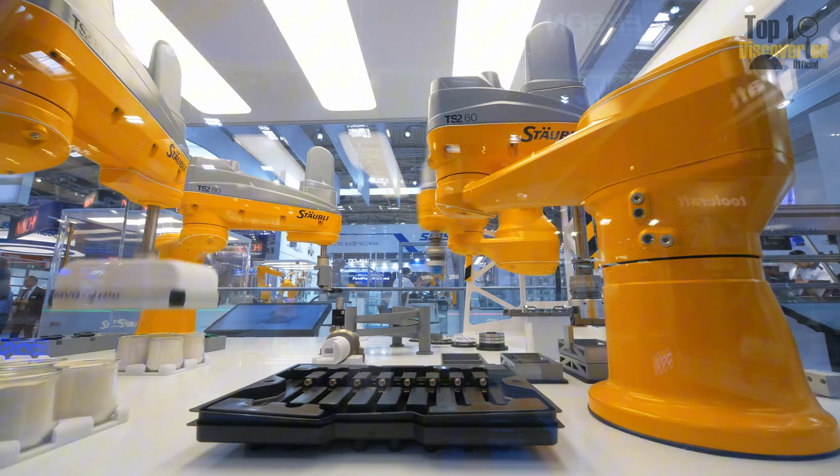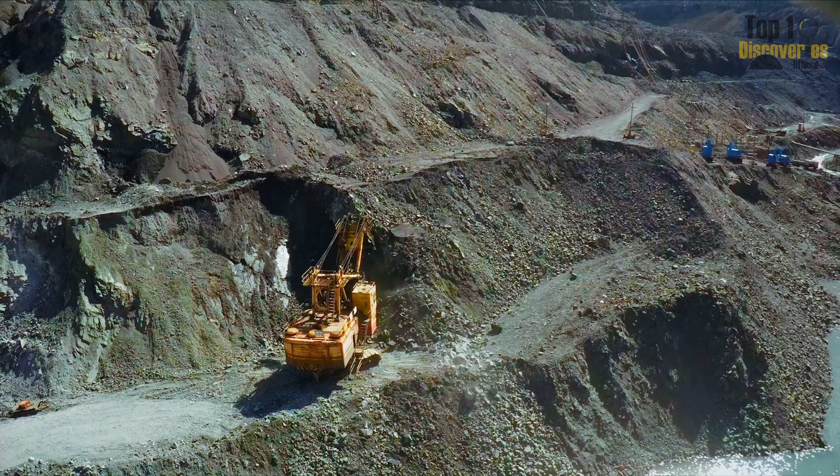Energy forms the foundation of modern existence, driving everything from illuminating bustling cities to fueling industrial manufacturing and supporting advanced technological infrastructure. For more than 100 years, the world has relied heavily on coal, oil, and natural gas as primary energy sources. These resources provide stability, but carry severe consequences: carbon dioxide emissions, climate change, air pollution, and significant risks to public health and well-being.

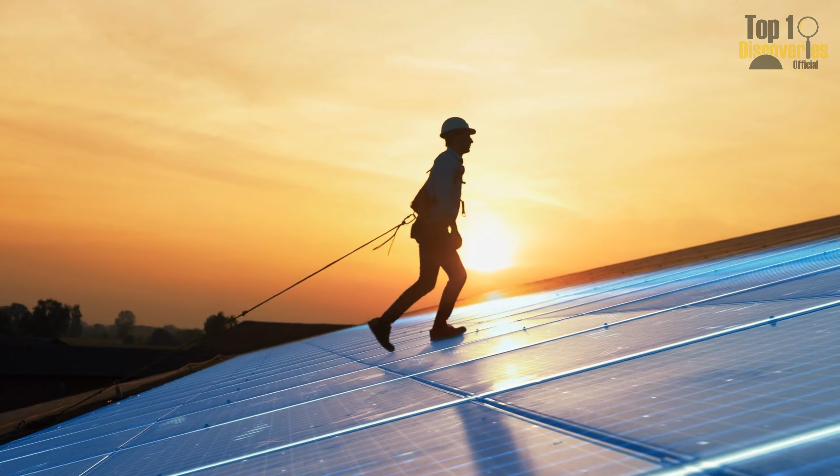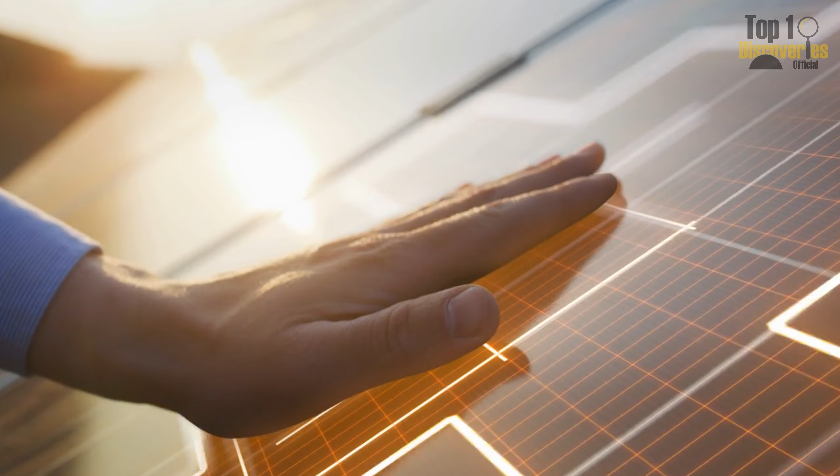Renewable energy options, such as wind, solar, and hydroelectric power, are increasingly viewed as viable replacements. Yet they come with inherent drawbacks. Their output hinges on unpredictable weather conditions, making consistent energy supply challenging. A wind farm, for instance, can produce hundreds of megawatts of electricity when conditions are optimal, but its output plummets when winds are faint or inconsistent. Similarly, solar panels operate effectively during daylight hours, but lose nearly all functionality under cloudy skies or at night.

At the same time, global energy demand is surging at an unprecedented rate. Data centers powering artificial intelligence, high-tech manufacturing facilities, and electrified transportation networks all require a steady, large-scale, and reliable electricity supply. The critical question is not merely about having enough electricity, but ensuring that electricity is clean, safe, and consistently available to meet these growing needs.

Confronted with the dual challenge of sustaining economic growth while drastically reducing harmful emissions, the world is urgently seeking innovative solutions. This is where next-generation nuclear technology, specifically small modular reactors, steps into the spotlight. These advanced systems are increasingly seen as a vital component, offering a transformative approach to achieving a sustainable, reliable, and environmentally friendly energy future.

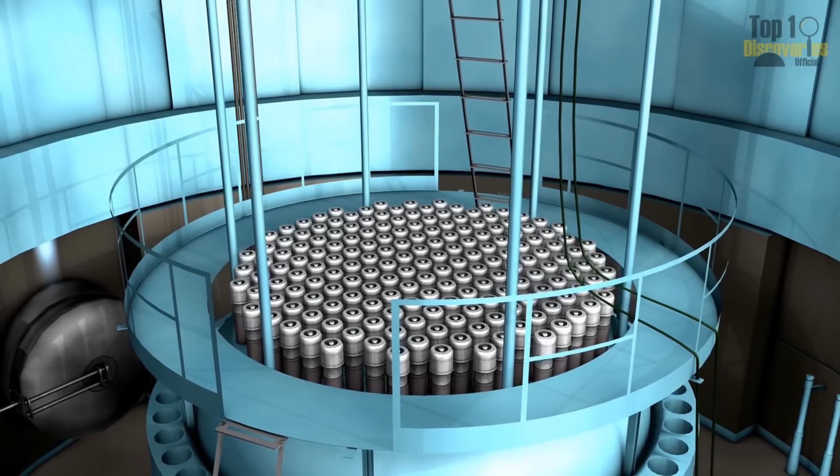While traditional nuclear power plants are often associated with colossal structures, costs soaring to tens of billions of dollars, and construction timelines stretching beyond 10 years, small modular reactors, known as SMRs, introduce a completely different paradigm. As their name suggests, the key difference lies in their compact size and innovative design. An SMR facility can fit within an area comparable to a single football field, a stark contrast to the sprawling nuclear complexes that once occupied hundreds of acres of land.

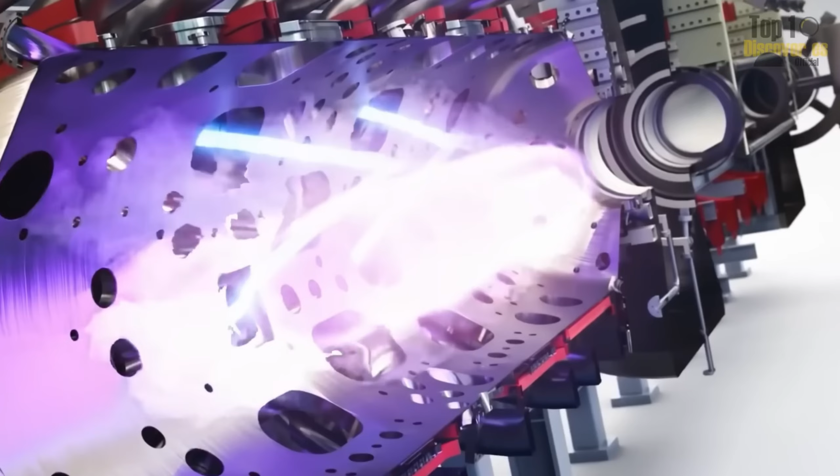This reduced footprint does not mean diminished capacity. A standard SMR can generate between 50 and 300 megawatts of electricity, enough to power a small city, an industrial zone, or a large-scale data center critical for modern technology.

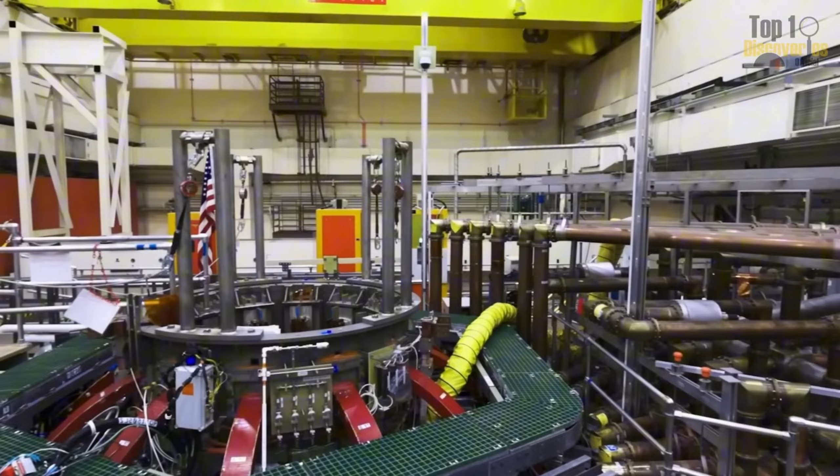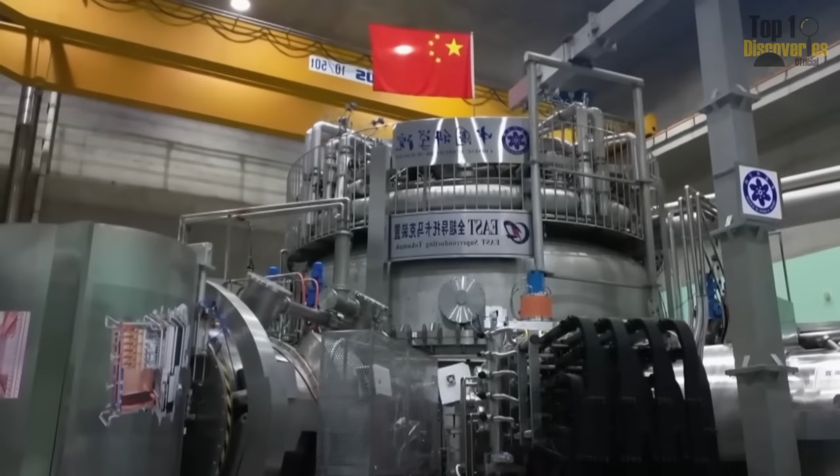The second groundbreaking feature is modularity. Instead of building the entire facility on site, the core components of SMRs are prefabricated in controlled factory environments with rigorous quality assurance processes. These pre-built modules are then transported to the installation site and assembled like interlocking building blocks. This approach dramatically shortens construction timelines, reduces the risk of project delays, and mitigates cost overruns, persistent issues that have haunted the nuclear industry for decades.

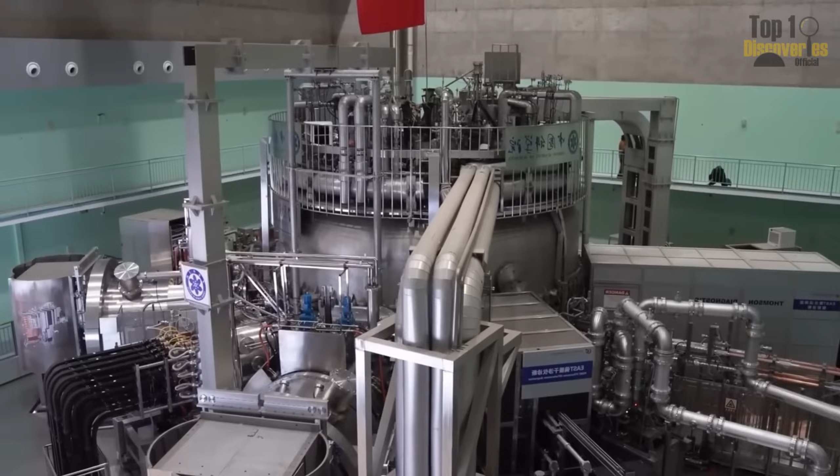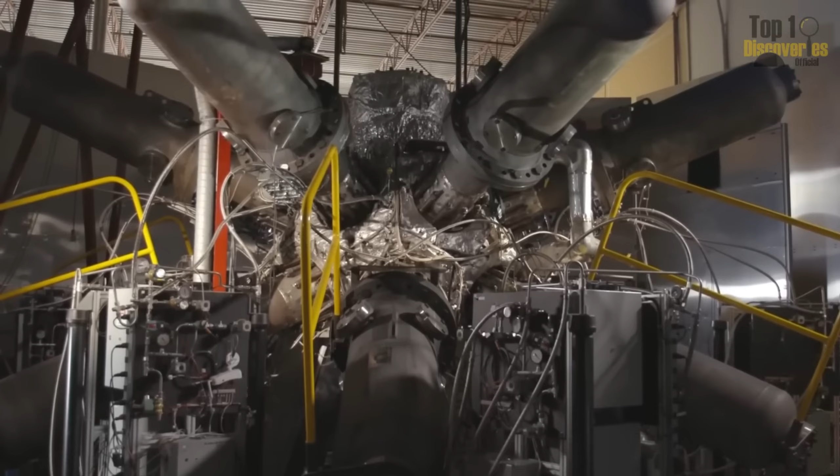Energy providers can start with a single reactor and scale up by adding more modules as energy needs grow, similar to how data centers expand by integrating additional server units. SMRs are also designed with superior safety features. Many models incorporate passive safety systems that operate using natural physical principles, such as gravity, convection, or atmospheric pressure, rather than relying entirely on electric pumps or complex mechanical equipment. This design reduces the likelihood of accidents and enhances the reactor's ability to remain stable during emergency situations.

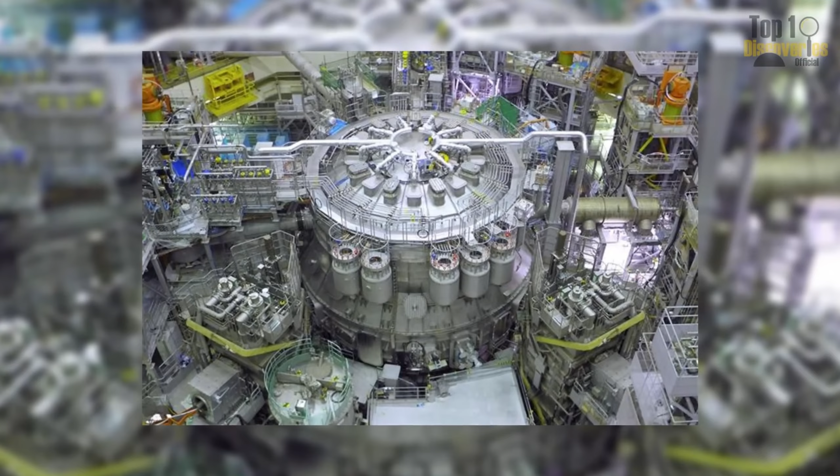With lower heat generation and moderate fuel requirements, SMRs also significantly minimize the risk of reactor core meltdowns, a concern that often fuels public apprehension about nuclear energy.

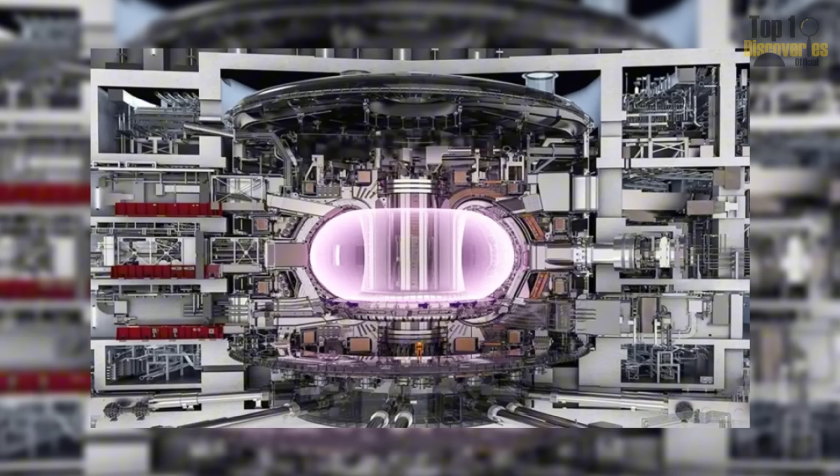Beyond electricity production, SMRs offer remarkable versatility across a range of applications. They can supply steam for chemical manufacturing plants, oil refineries, or material production facilities, provide heat for urban heating networks, and even support seawater desalination to produce fresh water in regions facing water scarcity. This adaptability makes SMRs an appealing solution for countries with diverse energy demands, from sustaining industrial operations to improving living standards for communities.

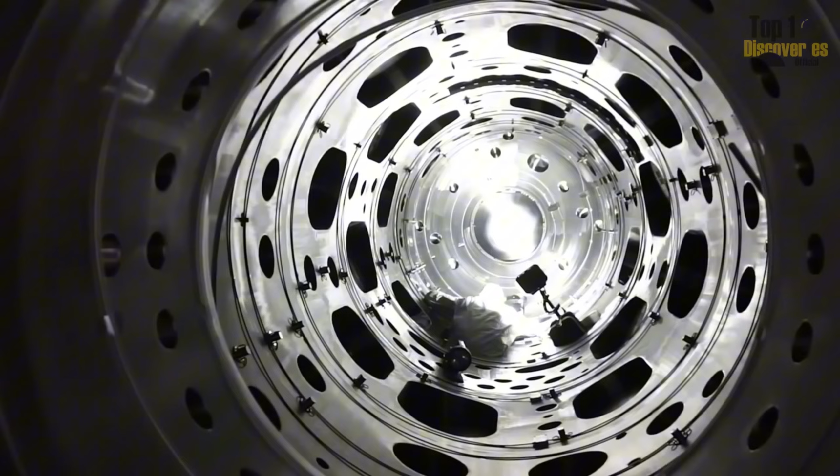Another key advantage is their flexible deployment. Thanks to their compact size and optimized safety protocols, SMRs can be installed closer to energy consumption hubs, rather than in remote, isolated locations. This proximity reduces electricity transmission costs and enables cities, industrial parks, or even remote islands to access reliable, on-site energy sources, enhancing energy security and efficiency.

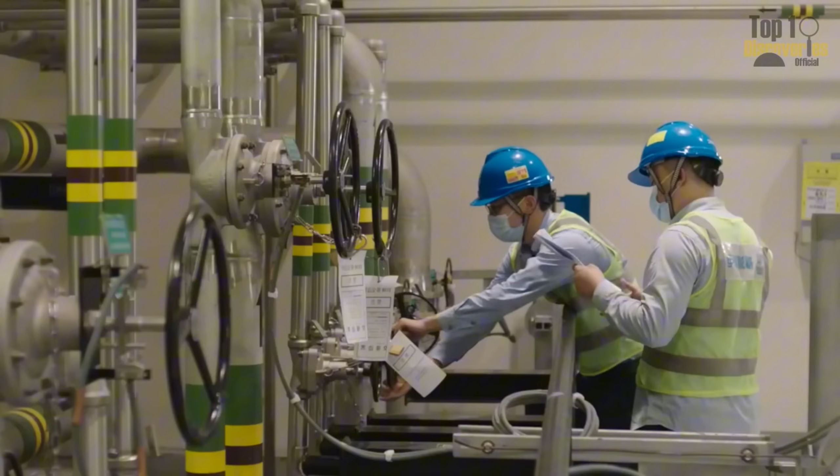The emergence of SMRs is reshaping how we view nuclear power. If traditional nuclear plants are akin to the bulky mainframes of the information technology world, SMRs are the compact, flexible, and scalable servers of the energy sector. This transformation marks the dawn of a new era, where nuclear energy can integrate seamlessly into power systems, working in harmony with renewable energy sources to build a sustainable, low-carbon electricity grid for the future.

China is swiftly emerging as a trailblazer in transforming small modular reactors, known as SMRs, from visionary concepts into tangible, operational realities. For many decades, the majority of nuclear energy projects were concentrated in nations like the United States, France, and Russia. However, China has now taken the lead by rapidly deploying advanced technologies that many other countries have only progressed to the design phase.

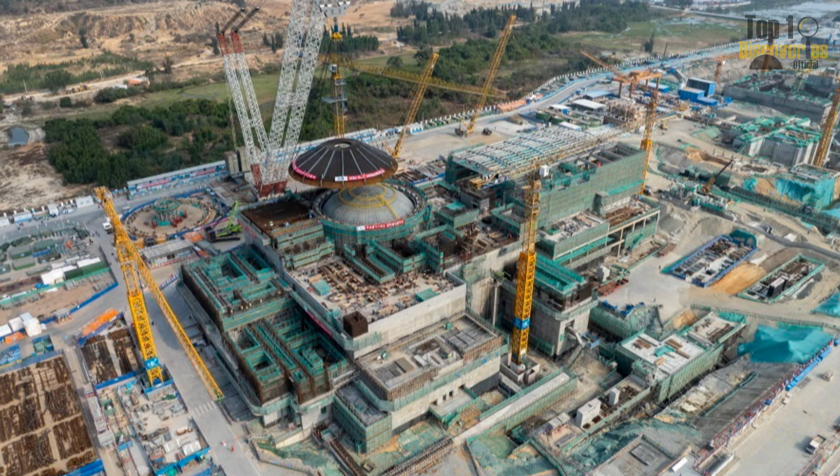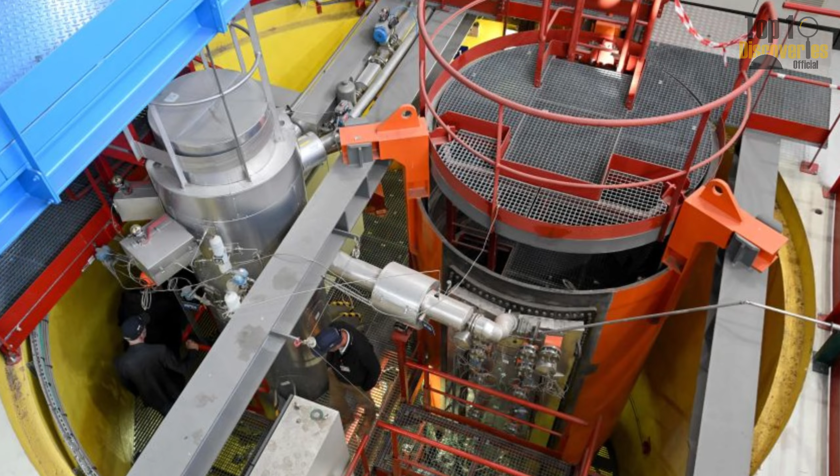Two flagship projects exemplifying this remarkable advancement are the HTR-PM and the Linglong One, showcasing China's bold strides in nuclear innovation. The HTR-PM, situated in Shandong province, holds the distinction of being the world's first commercially operational fourth-generation, high-temperature, gas-cooled reactor. Unlike traditional nuclear reactors that rely on water for cooling, the HTR-PM utilizes helium, an inert gas, to efficiently transfer heat. Each individual module of the system generates a capacity of 105 megawatts of electricity, and when two modules are combined, the total output reaches approximately 210 megawatts.

This substantial capacity is sufficient to provide stable, reliable electricity to more than 1 million residents. The successful commercial operation of the HTR-PM marks a historic milestone. It represents the first time a fourth-generation nuclear technology has been fully implemented in practical use on a global scale.

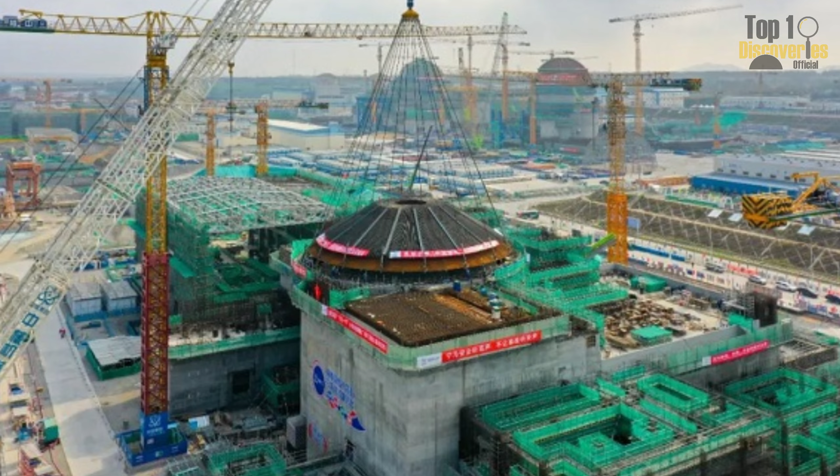Similarly, the Linglong One, also known as ACP-100, located on Hainan Island, stands as the first land-based commercial small modular reactor to receive approval from the International Atomic Energy Agency. With a generating capacity of 125 megawatts, the Linglong One can supply electricity to approximately 500,000 households. However, its significance extends far beyond power generation.

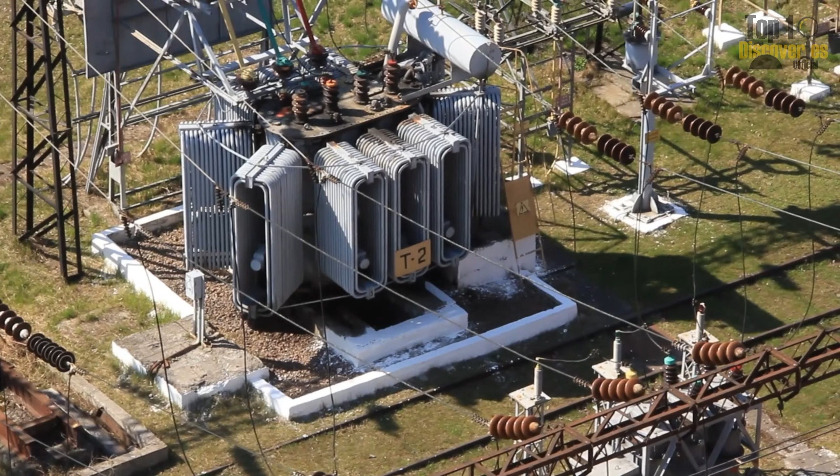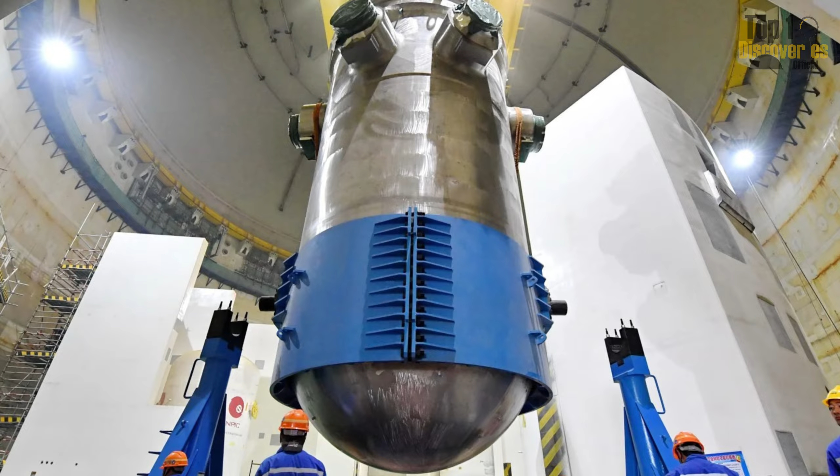The reactor's versatility enables it to provide heat for urban heating systems, produce steam for industrial applications, and, most notably, support seawater desalination, a critical necessity in Hainan, where freshwater resources are scarce, capable of converting seawater into tens of thousands of cubic meters of fresh water each day. The Linglong One demonstrates that SMRs are not merely sources of electricity, but also multifaceted infrastructure solutions addressing diverse needs.

What sets China apart is the extraordinary speed and expansive scale of its deployment efforts. While some small modular reactor projects in the United States or Europe remain mired in the regulatory approval process, China has already brought next-generation reactors into full commercial operation. The Chinese government has set ambitious targets to deploy numerous SMRs across the nation, with a particular focus on industrial cities and coastal regions facing freshwater shortages.

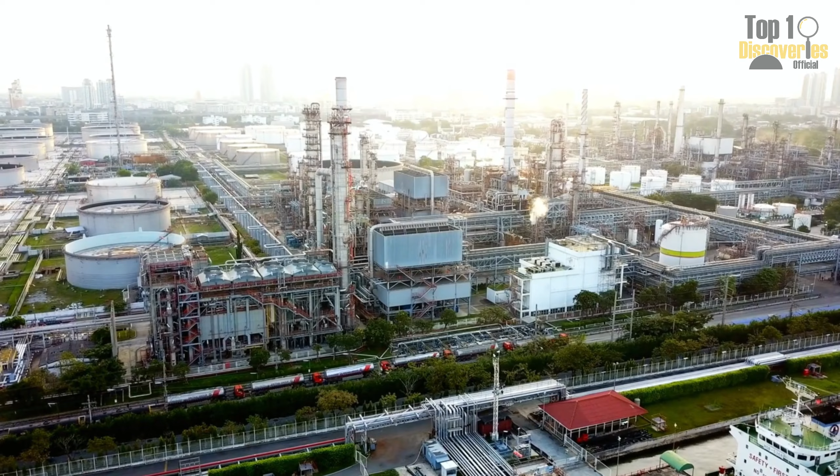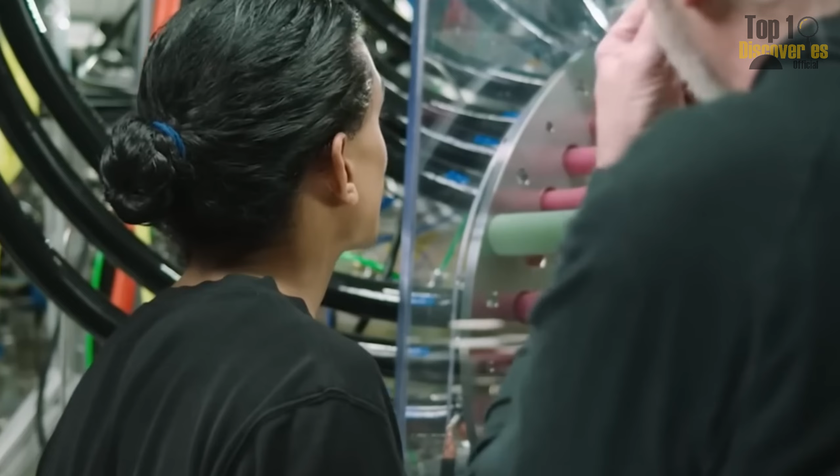This vision extends beyond domestic boundaries. China also aspires to export SMRs, positioning them as a strategic component of its clean energy technology portfolio to serve developing nations worldwide. These advancements highlight China's strategic positioning in the global nuclear energy race. Once a nation reliant on imported nuclear technology, China now independently designs, manufactures, and deploys cutting-edge reactors. Through small modular reactors, the country not only meets its enormous domestic energy demands, but also establishes a powerful new tool for energy diplomacy, solidifying its stature as a leading powerhouse in nuclear technology innovation.

Finland, a nation located in the far northern reaches of Europe, is widely recognized for its prolonged and severe winter seasons. In many parts of the country, winter temperatures regularly plummet below 0 degrees Fahrenheit, making heating an absolute priority in the nation's energy strategy. In the capital city of Helsinki, more than 90% of the heat required for residential and commercial use is supplied through centralized district heating systems. These systems primarily rely on power plants fueled by coal, natural gas, or oil, which generate considerable carbon dioxide emissions.

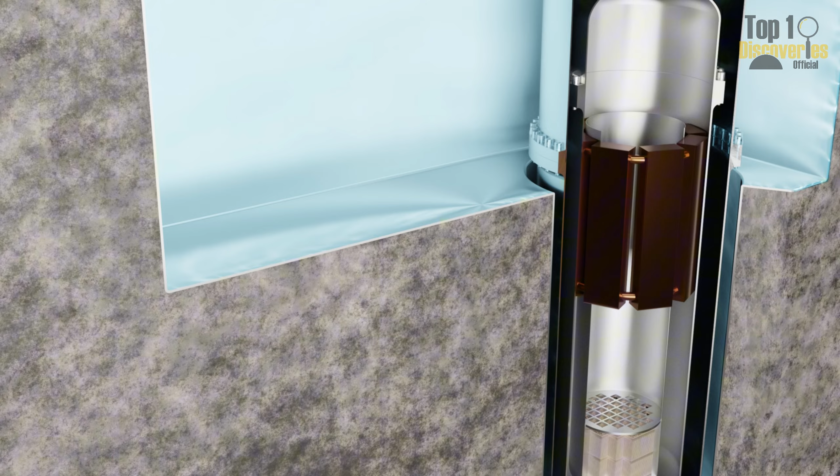With Finland's ambitious goal to achieve carbon neutrality by the year 2035, finding sustainable and eco-friendly alternatives to the current heating infrastructure has become an urgent necessity for the nation. This pressing need has driven Finnish scientists and businesses to explore small modular reactors, specifically the innovative LDR-50, or low-temperature district heating reactor. Unlike traditional large-scale nuclear reactors designed primarily for electricity generation, the LDR-50 is meticulously engineered to provide heat directly to urban district heating networks.

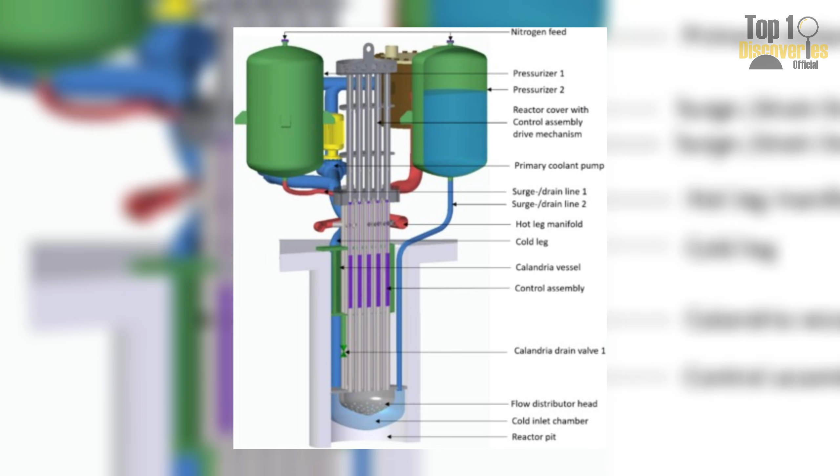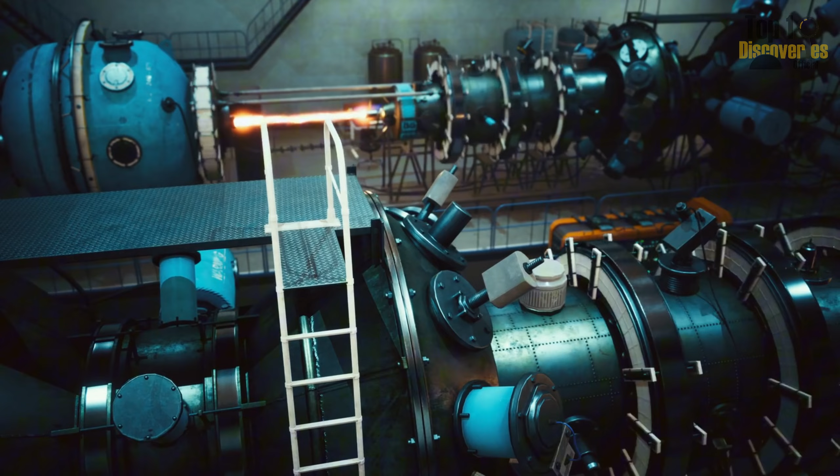With a thermal output of approximately 50 megawatts, a single LDR-50 reactor can deliver sufficient energy to keep tens of thousands of households warm and comfortable during Finland's harsh and extended winter months. A key advantage of the LDR-50 is its low-pressure operation combined with advanced passive safety systems. In the event of a power failure or technical malfunction, the reactor is capable of cooling itself without the need for complex mechanical pumps or external intervention.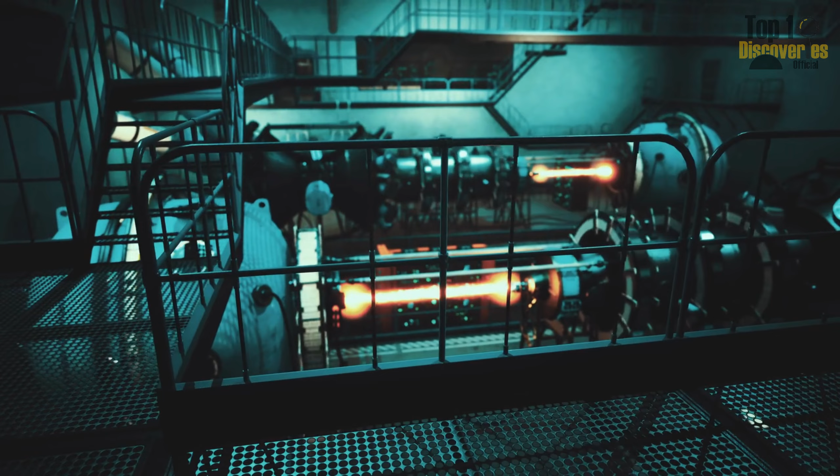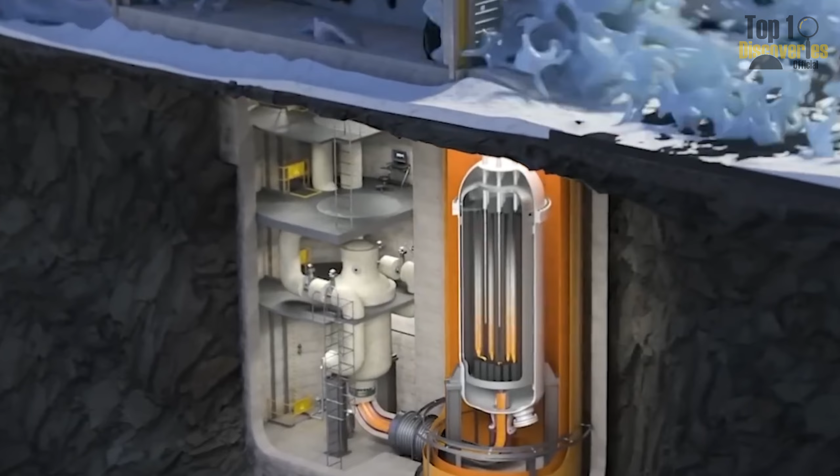This feature is critical for securing approval from local governments and communities to construct reactors in close proximity to residential areas. Furthermore, the LDR-50's compact design allows the entire facility to be built underground. Leveraging Finland's dense granite bedrock as a natural protective shield, this innovative approach not only reduces construction costs significantly, but also enhances safety by eliminating the need for the massive concrete containment domes typically associated with conventional nuclear power plants.

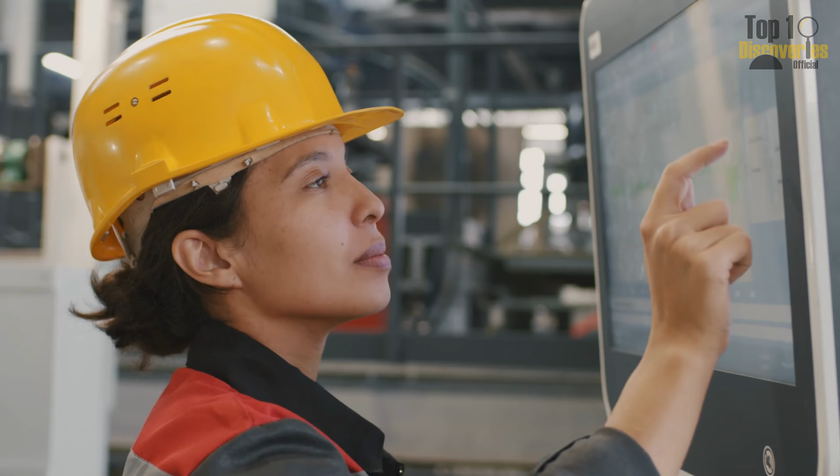For Finland, the primary value of small modular reactors lies not in electricity production, but in their potential to replace coal and gas-powered plants in the heating sector. Decarbonizing heating systems is a far more challenging task than decarbonizing electricity generation. Yet it constitutes a substantial portion of the country's overall carbon emissions.

By integrating SMRs into district heating networks, Finland can drastically reduce carbon dioxide emissions while ensuring that residents have access to a consistent and reliable heat supply throughout the long, frigid winter season. This initiative highlights Finland's practical and tailored approach to energy innovation. Rather than adopting the large-scale energy models of global superpowers, Finland focuses on addressing its specific need, providing clean, sustainable heating for urban populations.

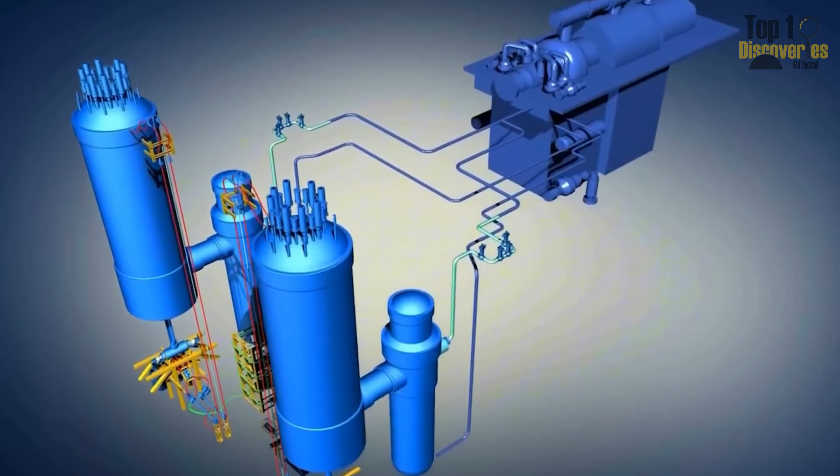If successful, the LDR-50 could not only help Finland meet its climate objectives, but also serve as a pioneering model for other European cities grappling with the challenge of phasing out coal and gas from their heating systems. With plans to implement small modular reactors in the coming years, Finland is demonstrating that next-generation nuclear technology is not exclusive to densely populated or heavily industrialized nations. It can play a vital and practical role even in a small nation with a steadfast commitment to combating climate change and building a sustainable future.

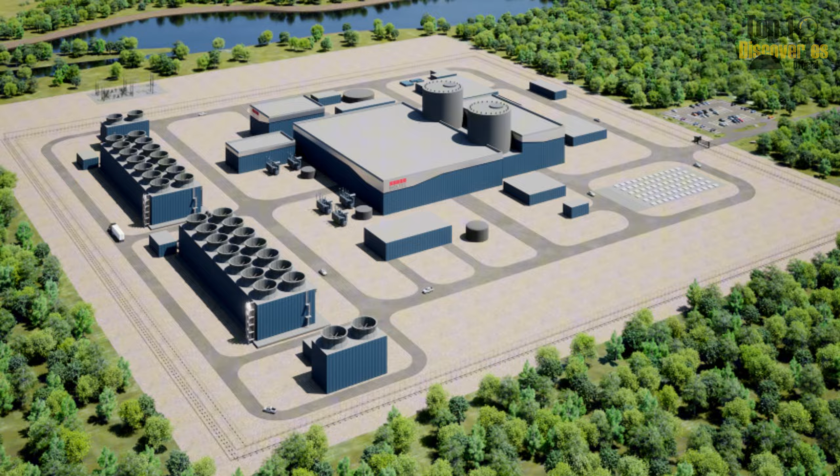China and Finland are charting distinct courses in their adoption of small modular reactors. Yet both nations view these innovative reactors as pivotal technology for constructing sustainable energy systems. A comparison between the two countries vividly illustrates the extraordinary flexibility and immense potential of SMRs, which can be customized to address vastly different national priorities and challenges.

In China, the primary focus is on delivering stable, large-scale electrical power. With a population surpassing 1.4 billion individuals and a robust heavy industrial economy, China demands an energy source that is both environmentally clean and sufficiently powerful to support its continuous economic expansion. Projects such as the HTR-PM and the Linglong One exemplify this strategic direction. The HTR-PM, boasting a capacity of 210 megawatts, and the Linglong One, with 125 megawatts, underscore China's commitment to reliable electricity production.

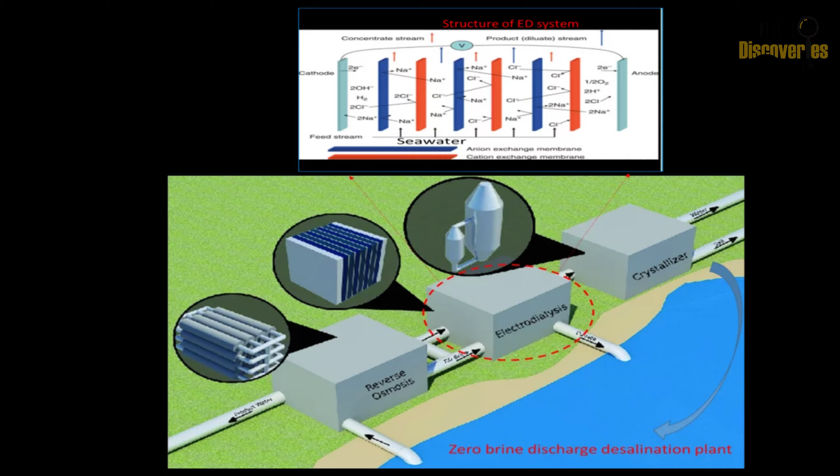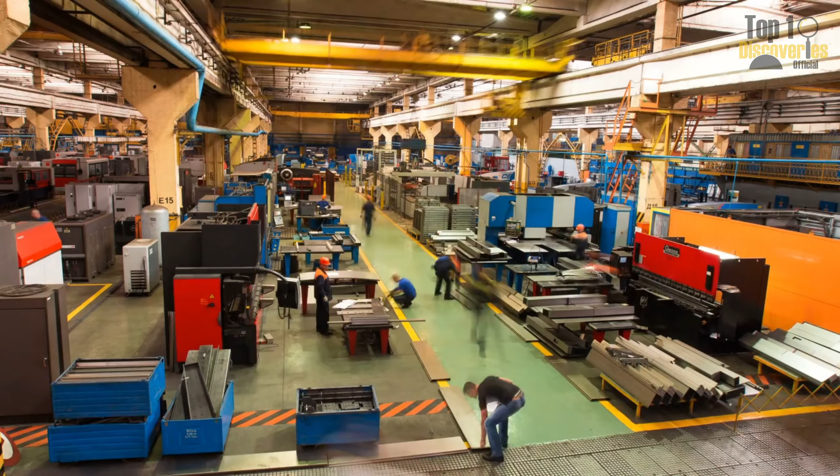Beyond generating power, China integrates additional capabilities, such as seawater desalination and industrial steam production, into these projects. This approach simultaneously tackles multiple pressing issues: shortages of fresh water, the need for industrial heat and manufacturing processes, and the rising electricity demands of urban populations. This comprehensive, multi-purpose strategy optimizes both economic benefits and societal advancements from a single nuclear initiative.

Conversely, Finland's priority is not centered on vast electricity output, but on addressing a unique challenge: providing heat during its harsh winter months. With district heating systems supplying up to 90% of the heating needs for residents in the capital city of Helsinki, transitioning from coal and natural gas to SMRs offers a direct path to reducing carbon emissions in a critical sector.

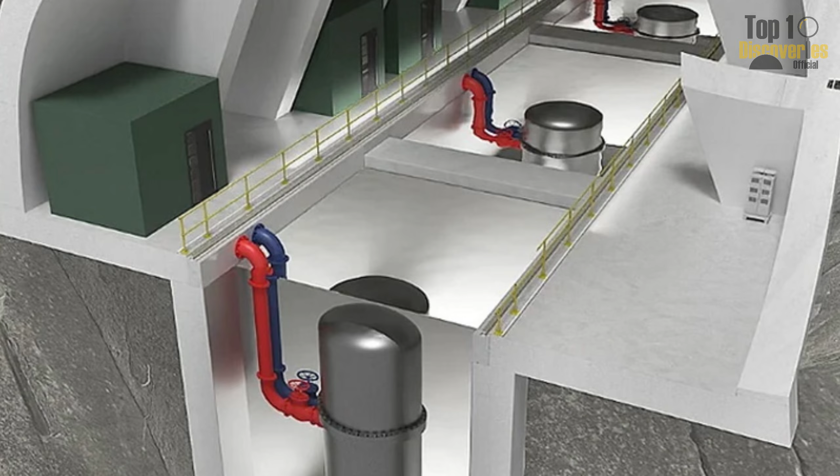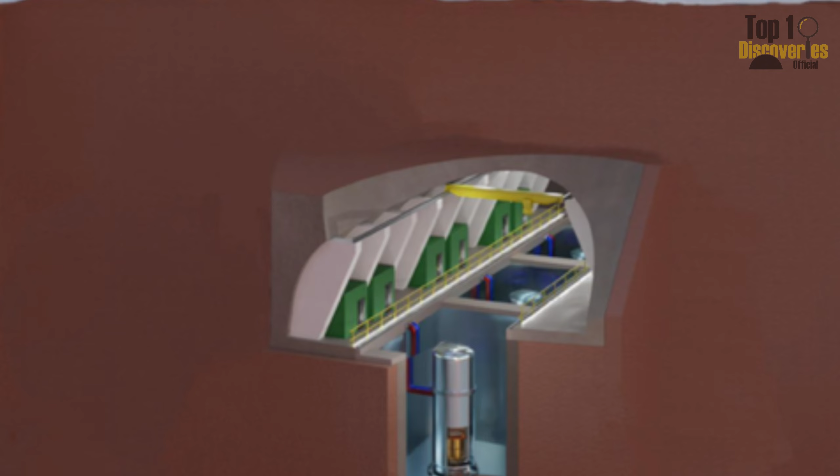The LDR-50, or low-temperature district heating reactor, with a thermal capacity of approximately 50 megawatts, is precisely designed for this purpose. Compact in size, equipped with advanced passive safety systems, operating at low pressure, and constructed underground, the LDR-50 represents a meticulously crafted solution tailored to the specific requirements of this Nordic nation.

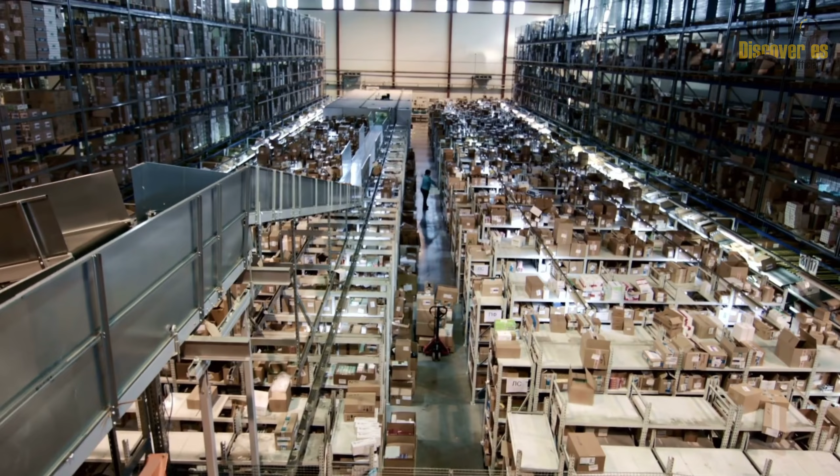The comparison highlights how each country capitalizes on its distinct strengths. China leverages SMRs as a cornerstone of its ambitious industrial and technological agenda, demonstrating its capacity for large-scale manufacturing, rapid project deployment, and aspirations to export this technology globally. In contrast, Finland adopts a localized and pragmatic approach, focusing on addressing community-driven needs and advancing its climate objectives. One nation emphasizes global influence and scale, while the other prioritizes practical, region-specific adaptation.

This divergence underscores the fundamental strength of SMRs, their remarkable adaptability and versatility. The technology is not limited to a single, rigid framework. It can serve as a robust electricity solution for a densely populated nation, while also providing clean, reliable heat for a small urban community. This level of flexibility is a feat that traditional energy sources struggle to accomplish.

From a global perspective, China and Finland demonstrate that small modular reactors are not merely theoretical concepts, but are actively being implemented in diverse, practical ways. Both nations, united in their pursuit of carbon reduction, affirm that SMRs have the potential to become a transformative tool, strategically redefining the global energy landscape for the 21st century.

Although small modular reactors are seen as a promising solution for clean energy systems, the path to making this technology widespread is fraught with obstacles. These challenges are not solely technical, but also encompass economic, legal, and societal trust issues. The first major hurdle is the initial investment cost.

One of the most significant promises of small modular reactors is cost reduction through mass production in factories. However, during the early stages of deployment, costs remain high. To achieve economies of scale, a substantial number of reactors must be built consistently. This creates a difficult cycle to break. Nations want lower costs but hesitate to invest without clear evidence of economic viability. Governments and financial institutions must step in to provide initial momentum, paving the way for stronger private sector involvement.

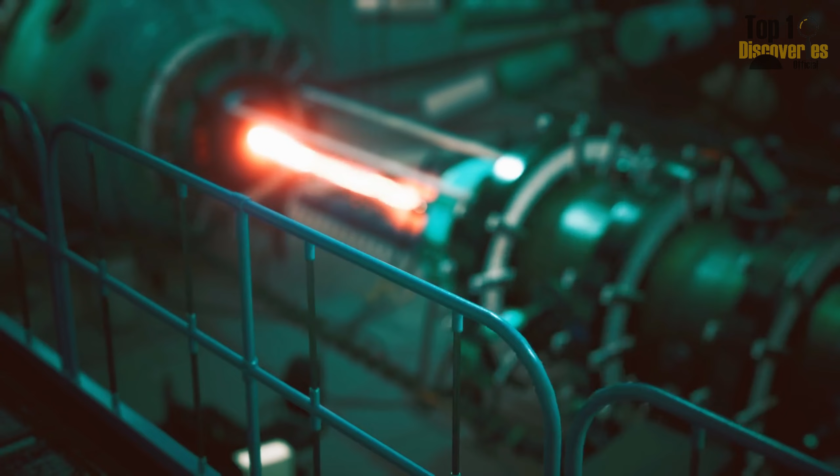These challenges are not insurmountable. In fact, openly acknowledging these limitations is a vital step toward maturing the technology. Initial investments, regulatory reforms, effective waste management, and fostering public confidence will determine how quickly small modular reactors can transition from experimental projects to becoming a cornerstone of the global energy system.

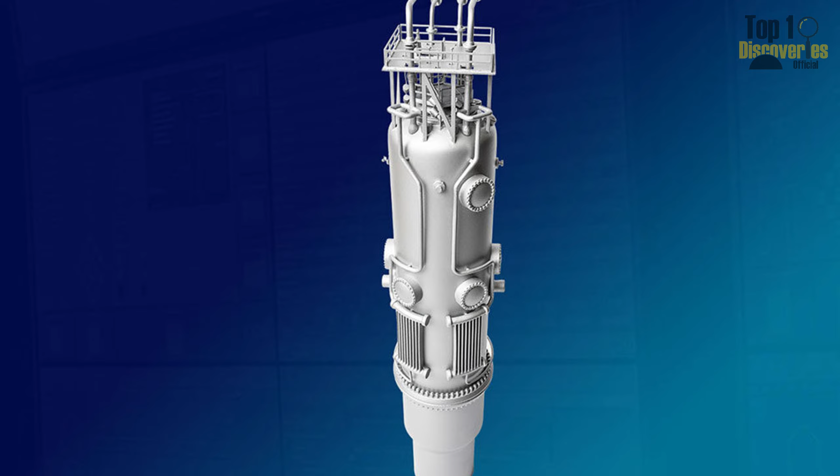The development of small modular reactors extends far beyond China and Finland. On a global scale, a new race is unfolding, where nations and major energy corporations are fiercely competing to establish leadership in next-generation nuclear technology. In the United States, numerous energy technology companies are investing heavily in small modular reactors. Designs such as the NuScale Power Module, with a capacity of 77 megawatts per reactor, and the TerraPower Natrium project, backed by Bill Gates, are garnering significant attention.

However, many projects face hurdles related to high costs and complex regulatory processes. The greatest challenge for the United States is streamlining licensing procedures while demonstrating economic viability to compete with coal, natural gas, and inexpensive renewable energy sources. In Canada, provinces like Ontario and Saskatchewan are collaborating to develop small modular reactors to support both the electrical grid and the mining industry. Canada aims to construct its first SMRs before the year 2030, viewing them as a solution to gradually replace coal plants and facilitate resource extraction in remote regions.

In Europe, beyond Finland, countries like the United Kingdom and France are also advancing their own SMR programs. The United Kingdom has announced plans to develop the Rolls-Royce SMR, a design with a capacity of 470 megawatts, targeting deployment within this decade. France, a nation with a strong tradition in nuclear power, sees small modular reactors as a means to maintain its leadership while progressively modernizing its aging reactor fleet.

According to data, more than 70 small modular reactor designs are currently under research or licensing worldwide, with capacities ranging from a few dozen to several hundred megawatts. Some models are so compact they can power a small town, while larger ones can directly replace coal or gas plants. This trend paves the way for flexible power grids, where SMRs complement renewable energy sources and ensure a continuous supply.

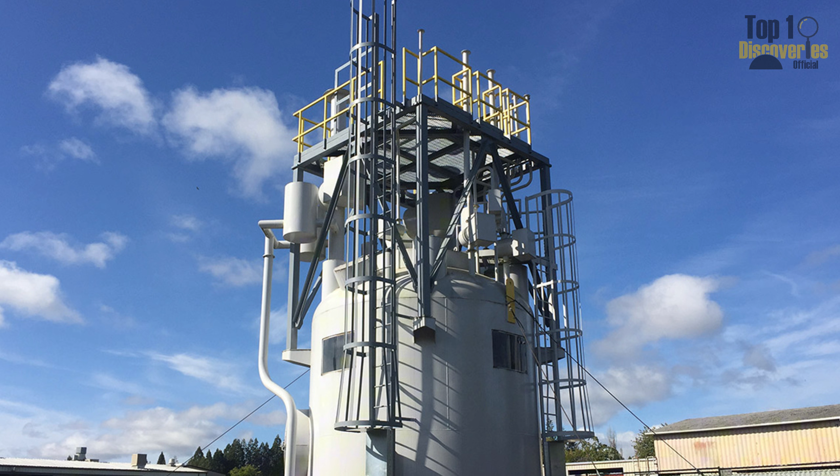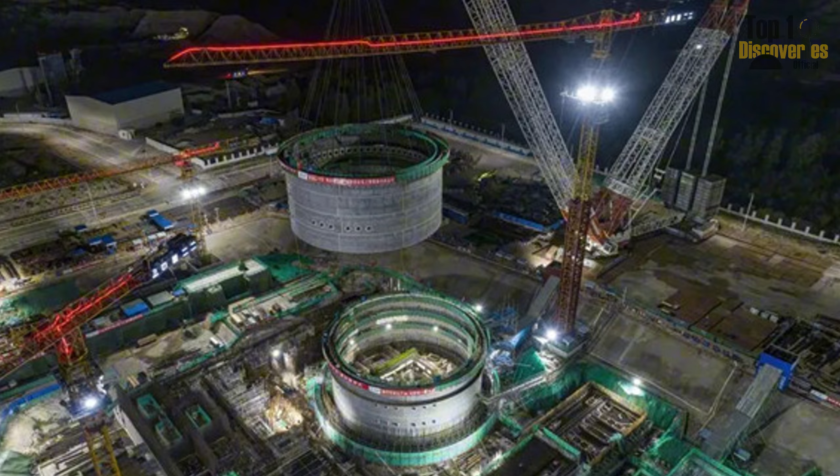Beyond electricity, many nations anticipate that small modular reactors will play a vital role in energy security and international technological competition. Exporting SMRs could emerge as a new form of energy diplomacy, akin to the export of liquefied natural gas or solar panels. China is poised to introduce its Linglong One to the global market, while the United States and Europe are working diligently to refine regulatory frameworks to avoid falling behind.

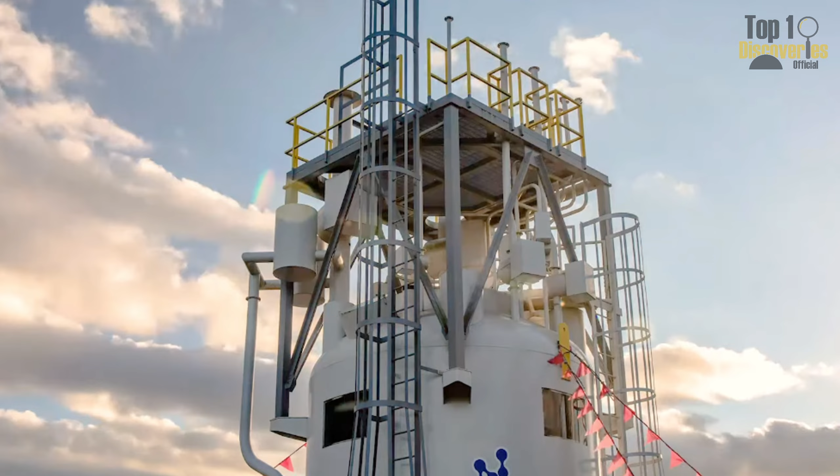The race for small modular reactors clearly reflects a shift in global energy thinking. Instead of relying solely on massive, costly nuclear projects, countries are seeking compact, scalable, and rapidly deployable solutions. The nation or entity that first proves the cost-effectiveness and safety of SMRs will gain a significant advantage in the energy market of the 21st century.

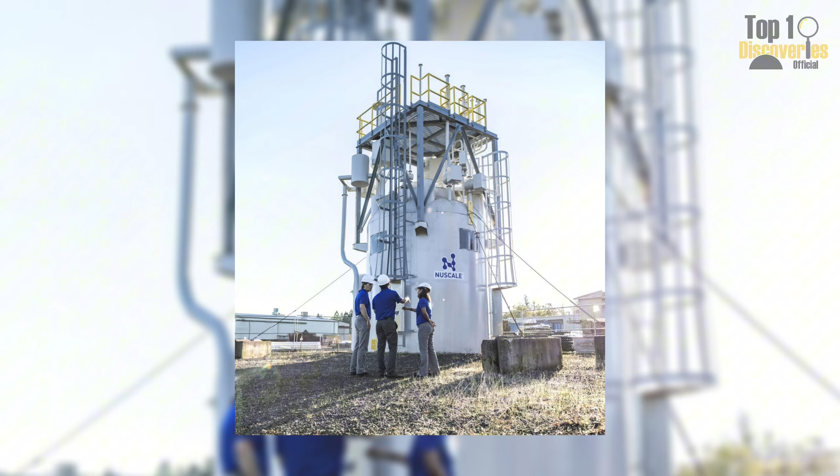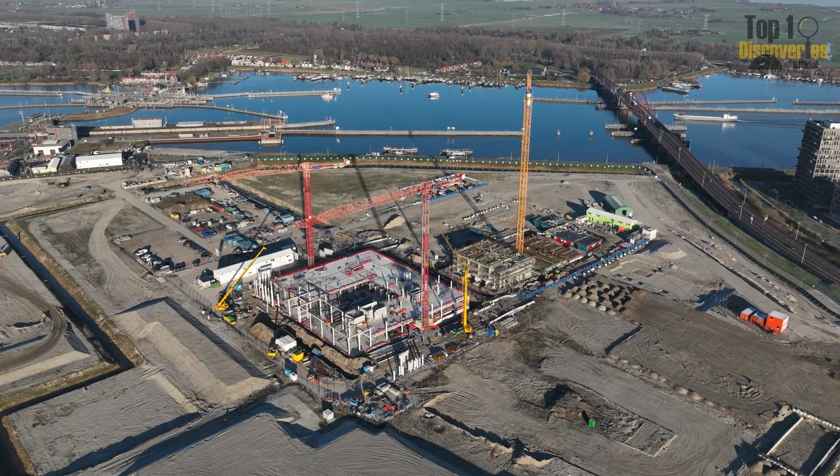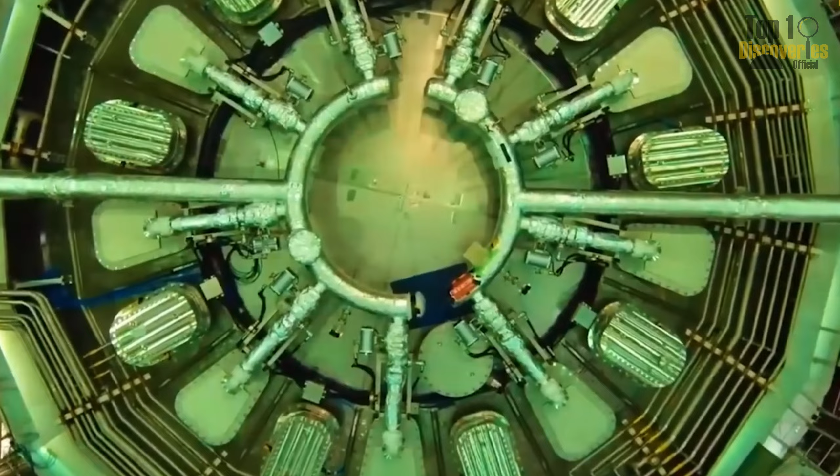The emergence of small modular reactors is boldly carving out a transformative new phase for the nuclear energy industry. The standout strength of this cutting-edge technology lies not only in its compact, space-efficient design or its remarkable ability to be constructed rapidly, but also in its groundbreaking capacity to expand the applications of nuclear power into realms that were previously overlooked or underutilized. From generating reliable electricity to supplying heat for urban communities, powering heavy industrial processes, desalinating seawater for water-scarce regions, and even producing clean hydrogen to fuel the energy transition, small modular reactors introduce a revolutionary paradigm of flexibility, adaptability, and innovation in the global energy sector.

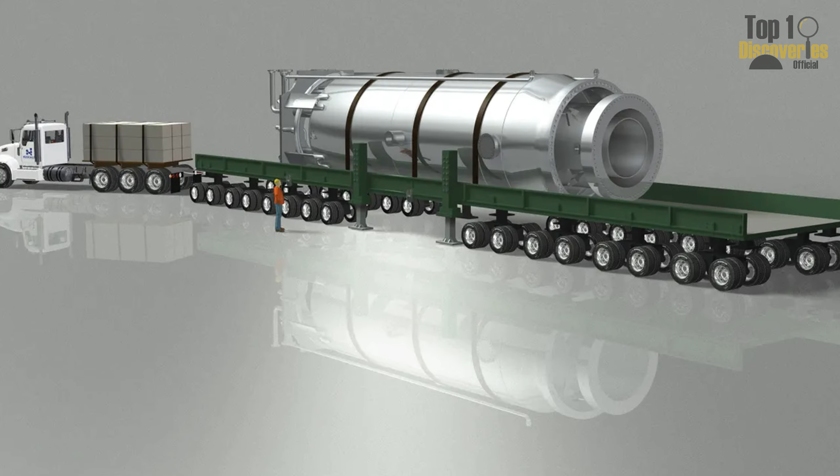One of the most critical advantages of small modular reactors is their ability to provide unwavering 24-hour, 7-day-a-week operational stability. Unlike renewable energy sources, which depend heavily on variable conditions such as wind speed or sunlight availability, these reactors operate continuously, delivering a consistent and uninterrupted power supply. This reliability positions them as an ideal complementary partner for other clean energy sources, such as solar or wind, helping to maintain balance, stability, and dependability within electrical grids.

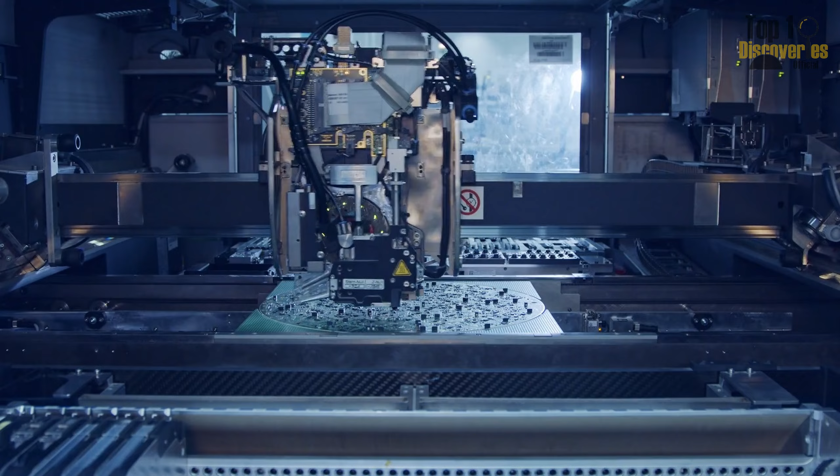In regions experiencing rapid expansion of technological infrastructure such as sprawling data centers, advanced semiconductor manufacturing plants, or large-scale industrial complexes, the ability to deliver stable, reliable electricity is just as valuable as achieving cost efficiency, if not more so.

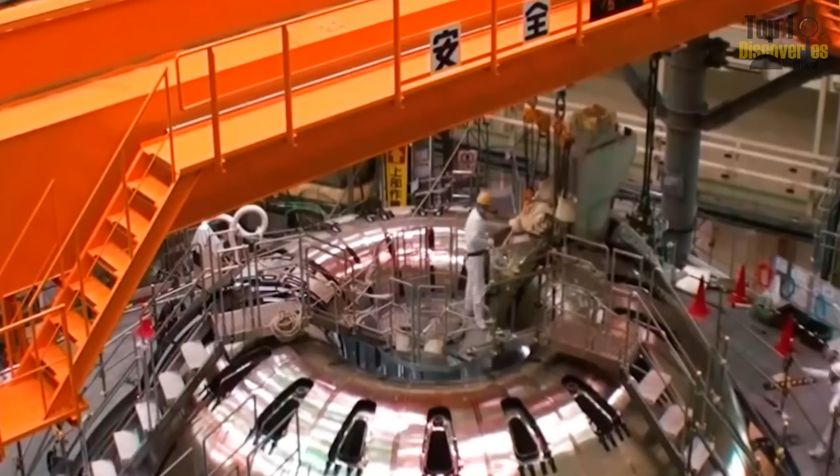Beyond their impressive technical merits, small modular reactors carry profound strategic significance on the global stage. Nations that take the lead in mastering and deploying this technology early stand to gain a substantial competitive advantage that could shape their influence for decades to come. Exporting small modular reactors not only generates significant economic revenue, but also serves as a powerful tool for energy diplomacy, fostering international partnerships and enhancing a country's global standing. A vibrant global market is steadily taking shape, where diverse reactor designs compete fiercely on critical factors such as cost-effectiveness, stringent safety standards, and practical applicability across various contexts.

However, the path to widespread adoption of small modular reactors is not without its challenges. The costs associated with large-scale production must be reduced over time to make the technology economically viable. Regulatory frameworks need to be carefully revised and adapted to ensure safety, compliance, and public confidence. Additionally, the management of radioactive waste remains a complex issue that demands innovative, long-term solutions. Yet, these obstacles are sparking unprecedented collaboration among governments, private industries, and the scientific community. By sharing expertise, prioritizing transparency in operations, and engaging in clear, honest communication with the public, stakeholders can build the trust necessary to secure broad acceptance of small modular reactors.

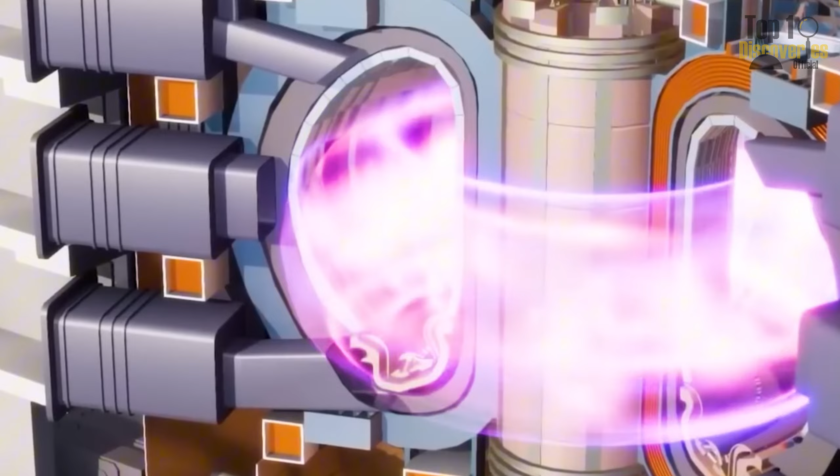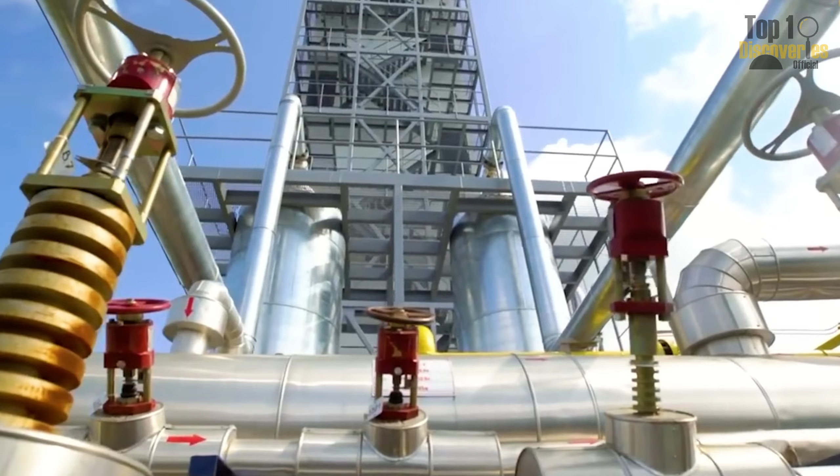When viewed from a broader perspective, the rise of small modular reactors represents a fundamental shift in how humanity approaches nuclear energy. Once regarded as an expensive, niche technology reserved exclusively for massive, centralized power plants, nuclear energy is now being reimagined as a versatile, adaptable tool capable of serving a wide range of contexts. Whether powering bustling metropolitan cities, remote islands cut off from traditional grids, or specialized industrial zones with unique energy demands, small modular reactors have the potential to deliver clean, stable, and sustainable energy solutions tailored to diverse needs.

A new era of nuclear energy is dawning, one that does not seek to replace existing energy sources entirely but rather to complement them, offering a practical and forward-thinking pathway toward a low-carbon economy. When integrated with renewable energy sources like solar, wind, or hydropower, small modular reactors can serve as a foundational pillar, ensuring the sustainability, security, and long-term resilience of global energy grids. Through this powerful synergy, the vision of a clean, reliable, and highly adaptable energy system for the 21st century is gradually becoming a tangible reality.